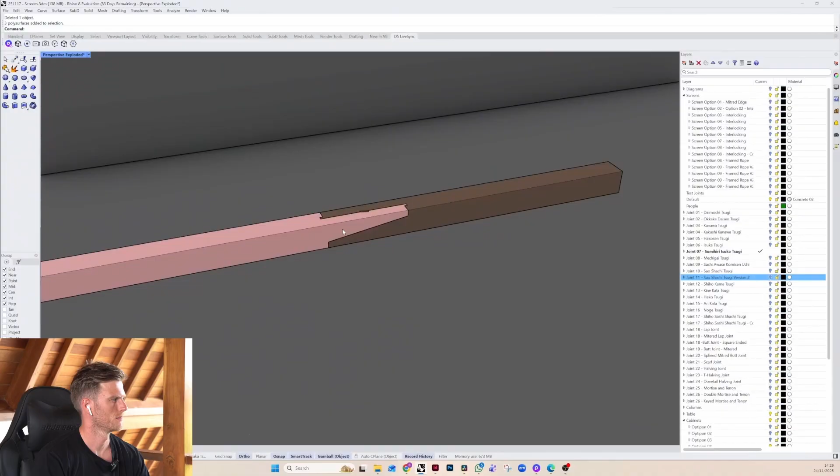Alright, so in this video, what I'm going to do is animate this beam that we have here. So we've got the Sumikiri Isuka Tsugi, which is this kind of double split joint with this locking key as well. So we've got that in Rhino. What we're going to do is create an animation similar to this one that I've already done in D5.

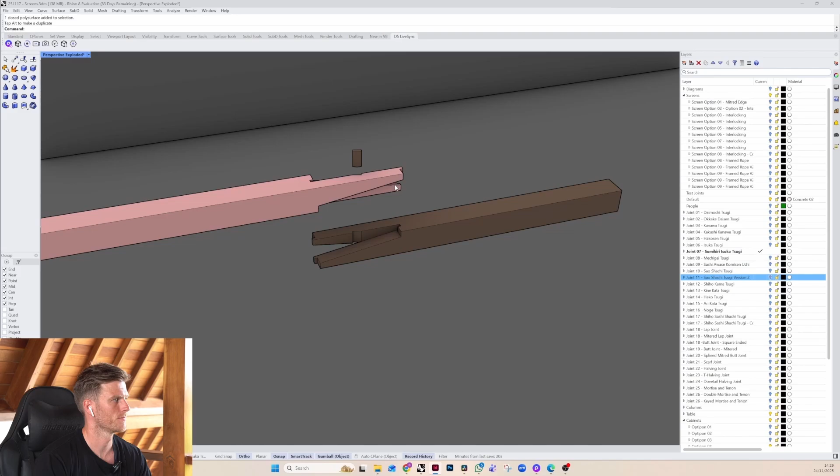So really simple, clean animation that just shows how these components come together. First thing that we need to do is go back to our Rhino. I'm just going to undo that so that the beam is together, and we're going to select all of our objects. You can see in Rhino that I've already arranged each object onto a material layer, and that's useful when we get it into D5, you'll see why.

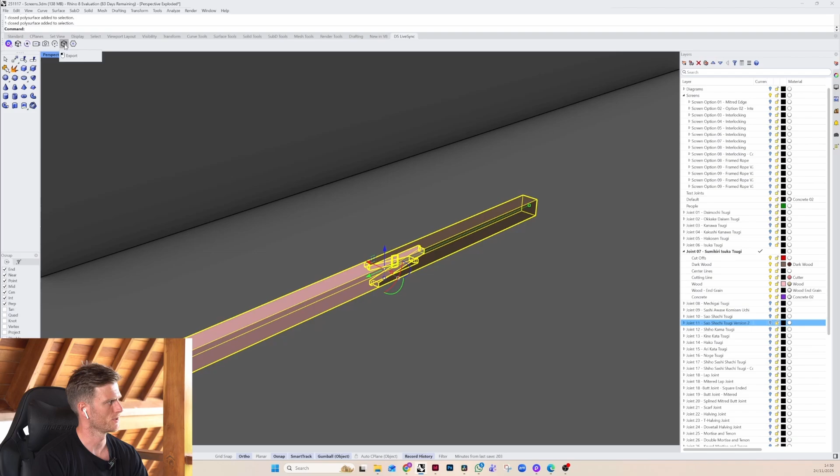But what I want to do is go and just click on this little icon here to export. And we've got a few options: export all, export object selection, or export by layer selection. We want to click export object selection, and we're going to keep our 3 layers intact and click export. And then just save it wherever you want, give it a good name.

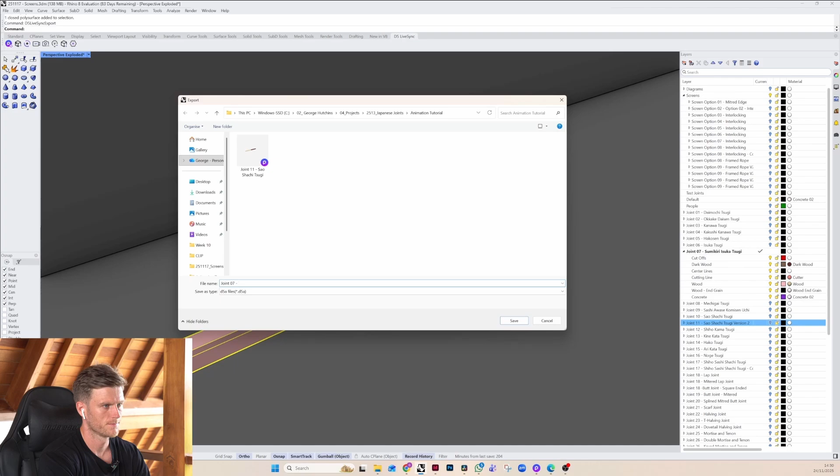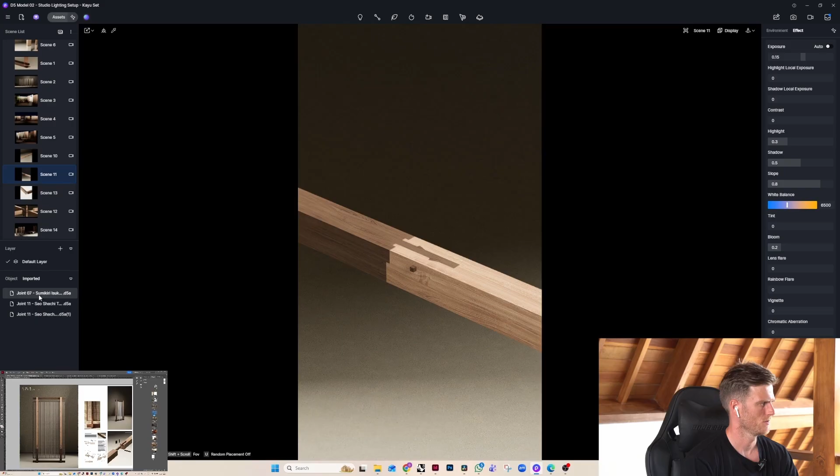What I want to do is just go up to import in the top left, and we can find our exported model, just click on that and open. Then you'll see down here in our imported list, we've got our different joints. So click on your object and just drag it into the scene.

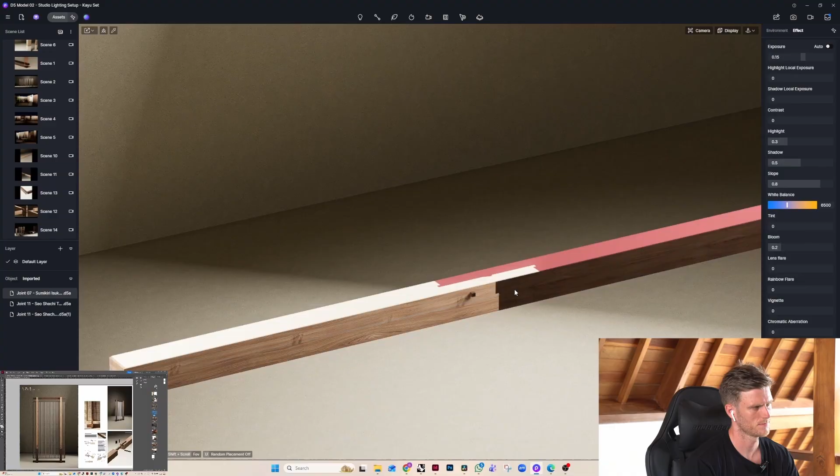So now we have our object in our scene, and we can just move it into place wherever we want it. Around there is good. Actually, I'm just going to drag it up a bit. You'll notice that it comes in without the materials, so we'll add our materials within D5.

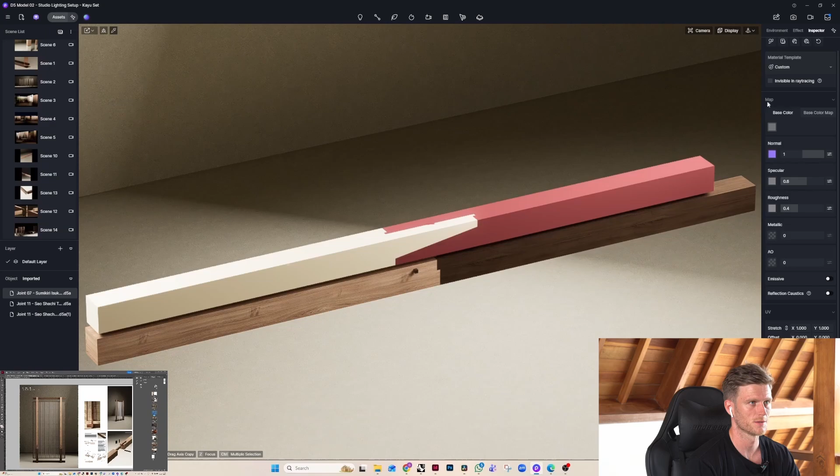A good way to do this is with the eyedropper tool. So if I just click I on the keyboard and click on this brown wood that I want, now you can see that material comes up. If I come up to here and click duplicate, I can just paste it onto the material that I want. You'll notice that the pin in there has also got the same material because it's on the same layer within Rhino.

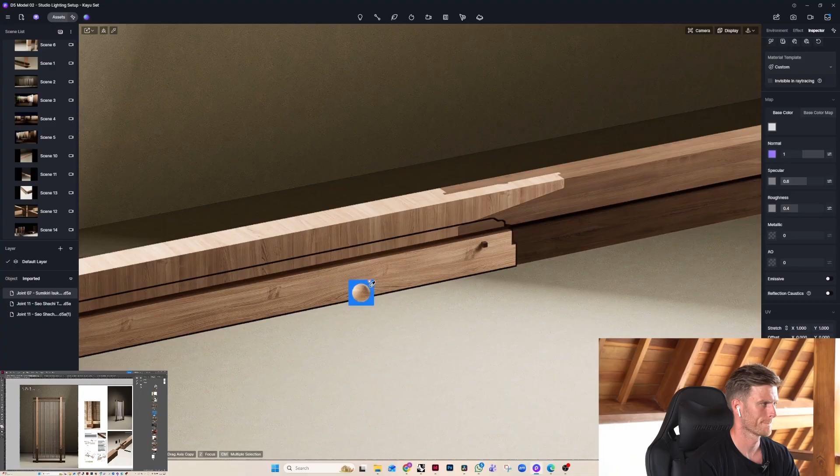And so if I do the same for the light color wood, now you'll notice we have something a little bit funny going on with this second beam where the mapping is in the wrong direction. So what I want to do is I could either rotate it directly in here in D5, so come down here and rotate 90, but then what that will do is, oh, it hasn't.

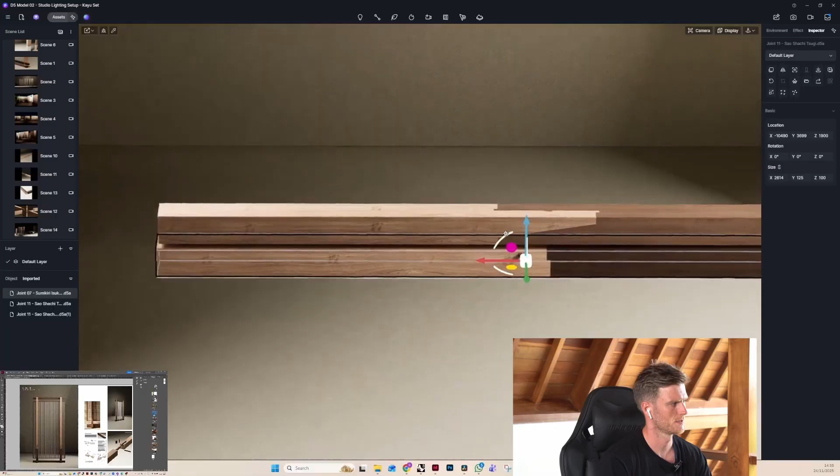Okay, that's good. Sometimes it would rotate all of these materials, so this one on the beam below would end up flipping as well. So then we go back into Rhino and remap in there, but this is okay for now.

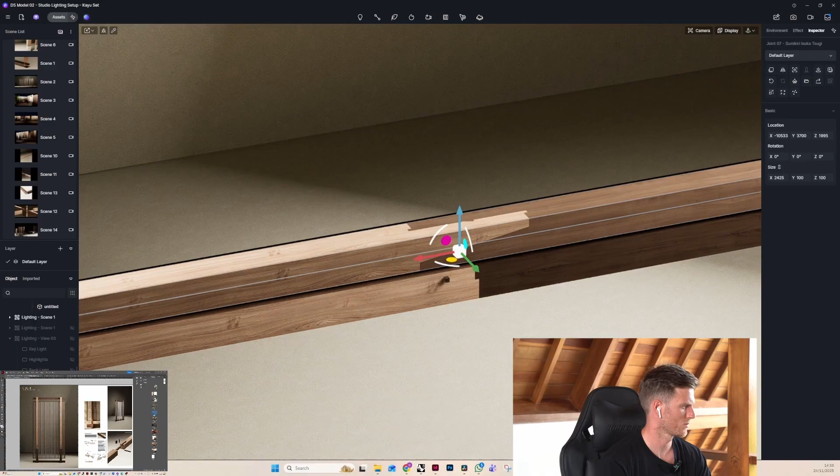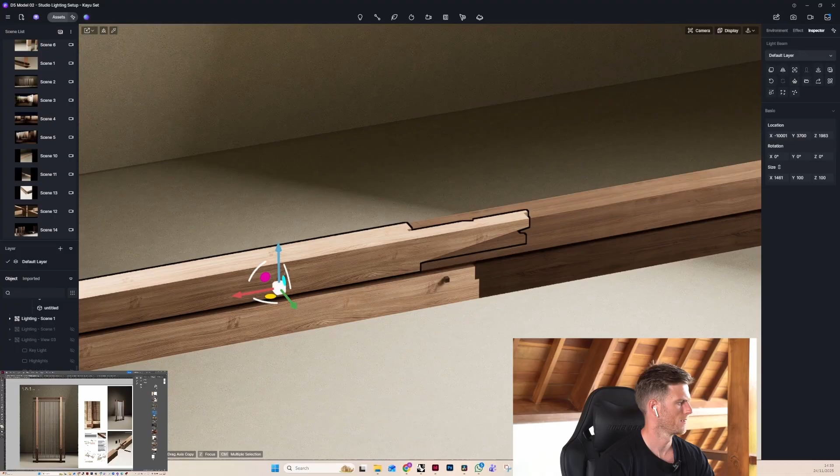So if we go into our object tab, you can see that that object has imported with our layers. So we've got wood and we've got dark wood. If I click on this object here, untitled, and move it up, you can see that that's our little lock pin. Just undo that, and I'm just going to rename these for clarity. I'm going to do light beam, then, and I'm going to name that dark beam.

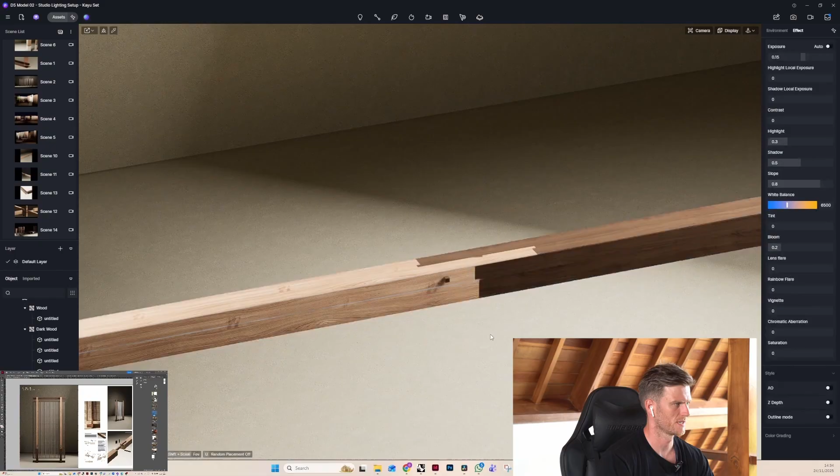And then I'm just going to move everything down and around the same location as my other beam. So now we have, if I can turn that one off, a new interlocking joint in position, ready to be animated.

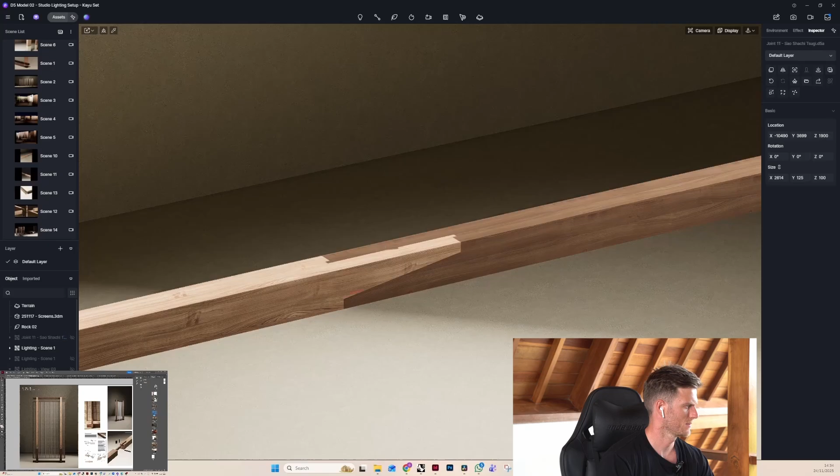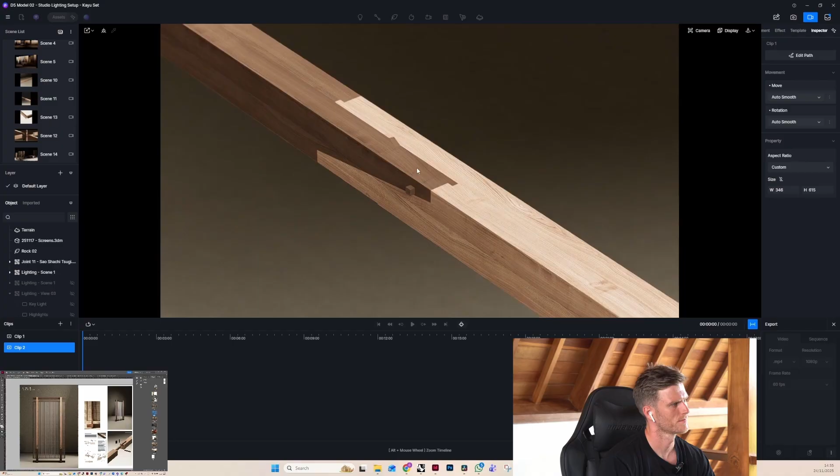So I'm going to go up to this little video icon here, and you'll see I've already got a few things going on here from the animation I made before. So I'm just going to create a clip, create a new one. And I'm going to go over to my starting scene. I'm going to hide this beam because I don't want that. I'm just going to update the scene.

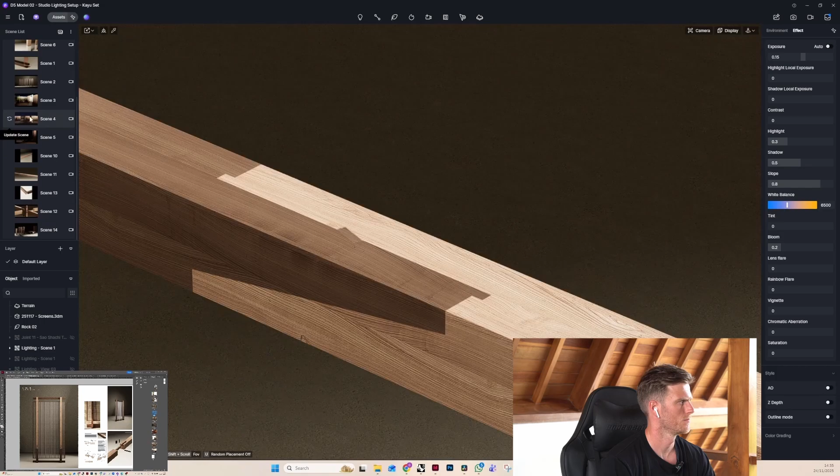So I want this to be my starting location. So I'm just going to click create shot here. So we've got shot one. And if I run it, you'll see that nothing happens.

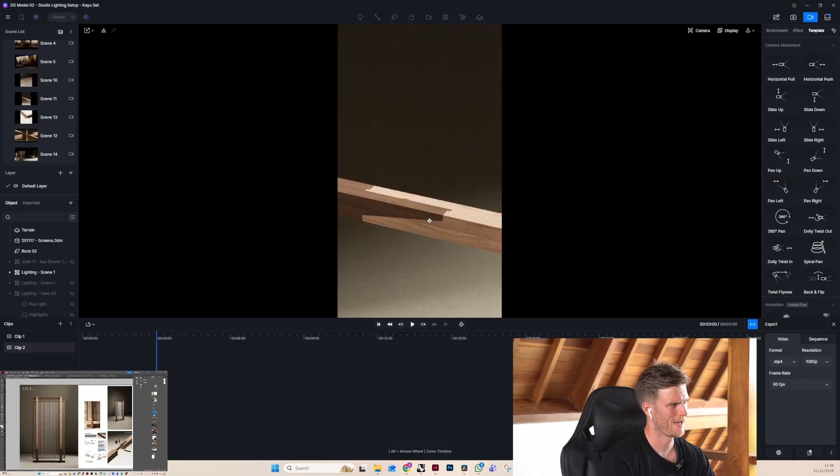So what I want to do is pan or orbit a little bit, zoom in to wherever you want your second shot to be. I think something maybe on a viewpoint like this might be good to show this interlocking piece of the dark wood. If I just go down to here, and if I just switch views on this little icon here, we go to our timeline. What I'm going to do, just demonstrate that again, is go to our end frame, maybe something like this.

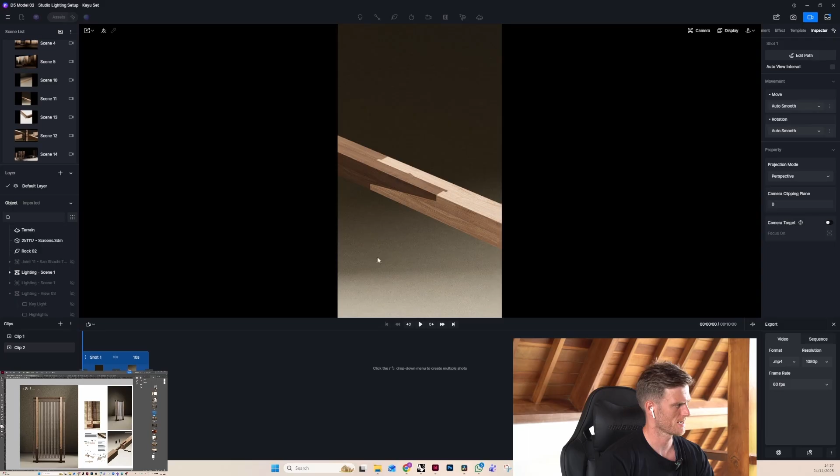And just click this little camera button, and that will add our end frame. You'll notice that was quite fast because we've got 3 seconds. So the duration of path is dictated by this number here. So we can put that to around 10 seconds. And now we'll have a much slower animation. What I'm going to do as well is just remove that ease in and ease out so that we have a continuous pace of shot.

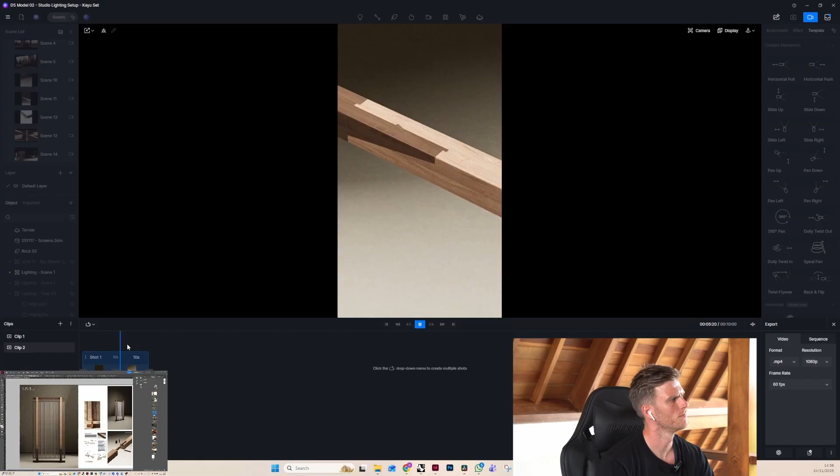Alright, so if I go to switch view again, I can start to add my animation. D5 is great because it has all of these different templates, and the ones we want to use for animating these beams are these ones. So I'm going to use ascend to start, and I'm going to do light beam to start. You'll notice here we're selecting the objects that we want to animate first, and we're going to do these one by one. Click done.

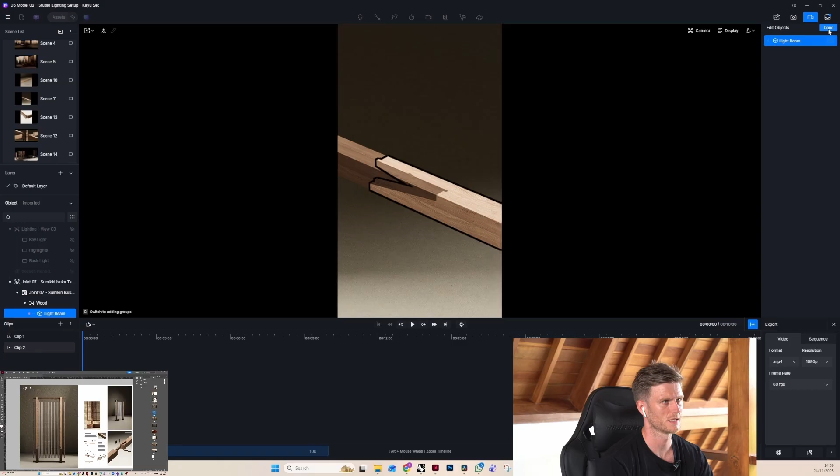You can see that beam flew into the scene there. So what I want to do now to edit that and get it moving how we want is select our little purple fly-in animation, maybe extend it a bit as that was quick, and I'm going to change the distance to 1 meter. I'm going to change the direction to 180, so that it comes in from the right hand side. Now if we roll that again, and spacebar, you'll see that slots together quite nicely, coming in from the right hand side. There you go.

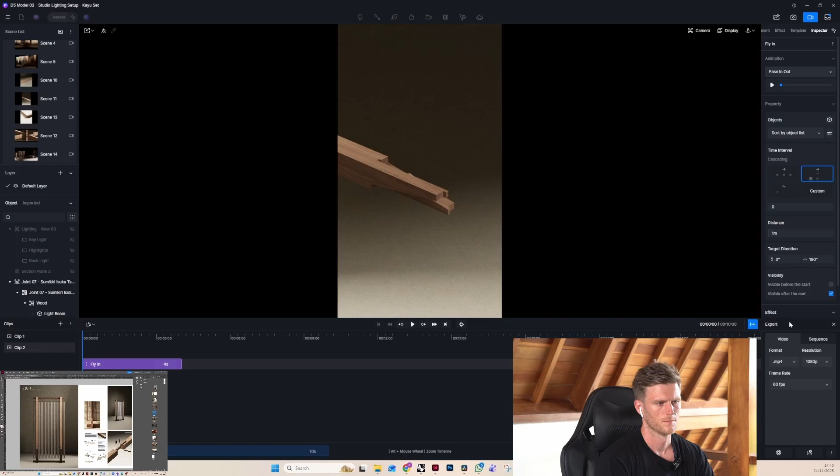Now I can duplicate that. If I click on this, I can edit the objects. I'm going to remove the light beam and just click on the dark beam, and have the same thing happening for the dark beam, except this time we want to go back to 0, because you want it to come from the left.

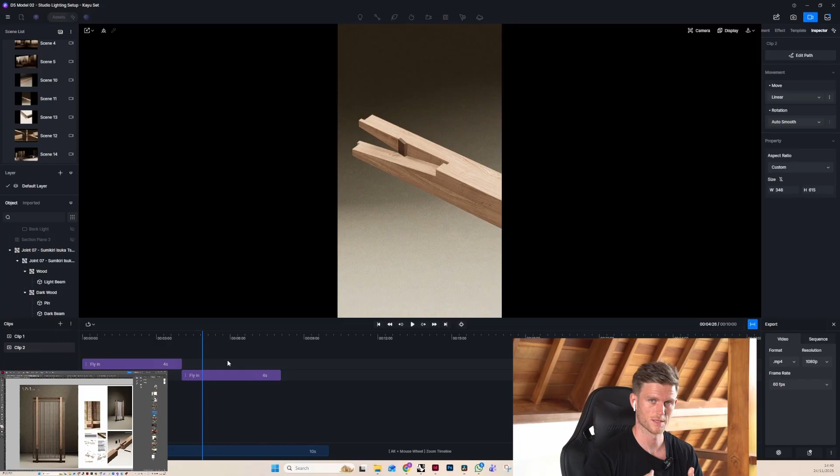You'll notice that there's this light beam coming in and then the dark beam coming in second. What I think would be cool is to have them coming in at the same time. So what I'm going to do is drag this second beam to around halfway between the first beam and see how that looks. I was thinking pretty good.

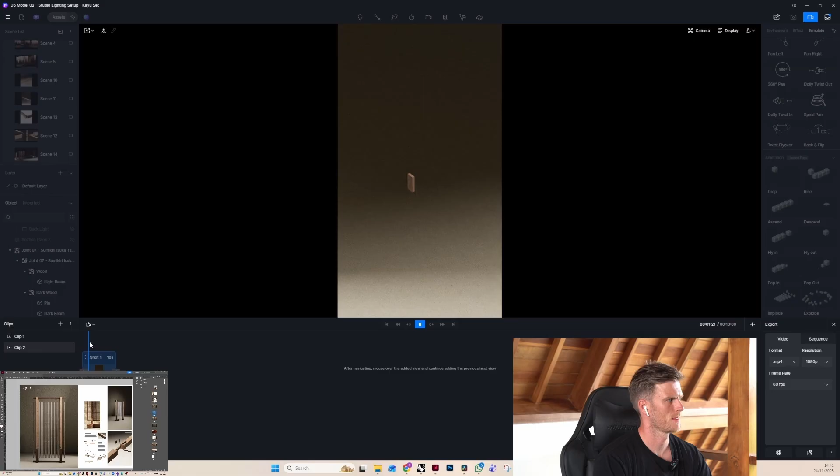But I think what's happening now is I don't quite like this camera movement. It's kind of going up and down, it's a bit distracting. So what I'm going to do is go back to our camera view. I'm just going to remove that one, and whilst we're animating, I'm just going to keep that camera still. So we'll work on our animation to start.

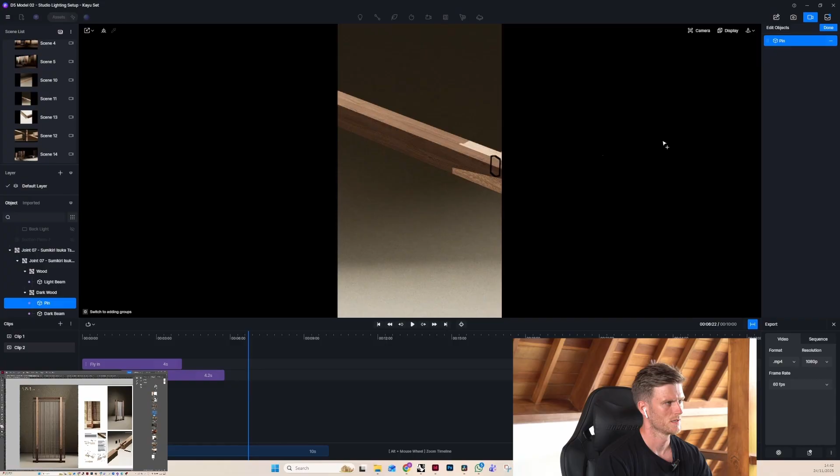Alright, so our two main beams are going in. Now what I want to do is drop our little pin into position. So, done. If I just demonstrate that again, delete that, I'm going to go back to our template tab, click on drop, and then just select our little pin in there. You'll notice there, pin is now an object, so just click done.

Now what will happen is, boom, our pin drops down from the sky and locks these beams together. I'm going to drag that underneath a little bit. It's moving a bit quick for me, so I'm just going to do, again, 1 meter. Maybe drag that out. I think that's pretty neat. Might even just drag this back a little bit so that the beams come in like that, yeah.

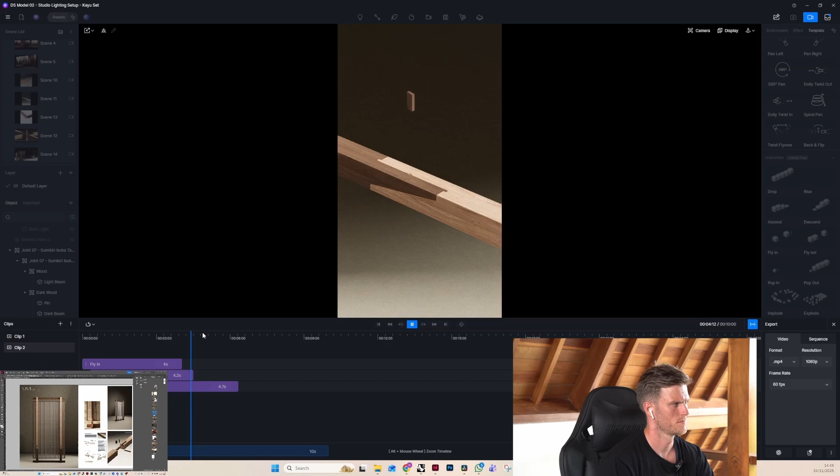And even that can come a bit quicker or a bit sooner. Okay, I'm happy with our sequence of animations. Now what I'm going to do is just make this camera movement a little bit more dynamic, a bit more interesting, so we're not so static. Again, I'm going to actually use the fly, zoom in a little bit, move left and pan. Something like this could work, and then just add scene there.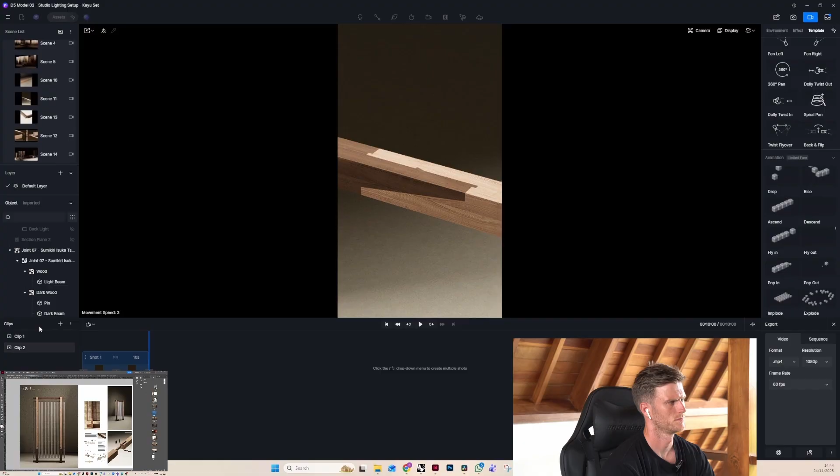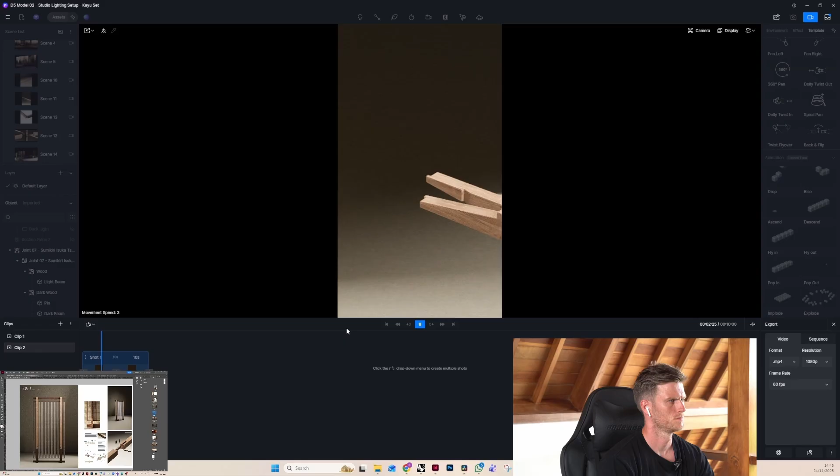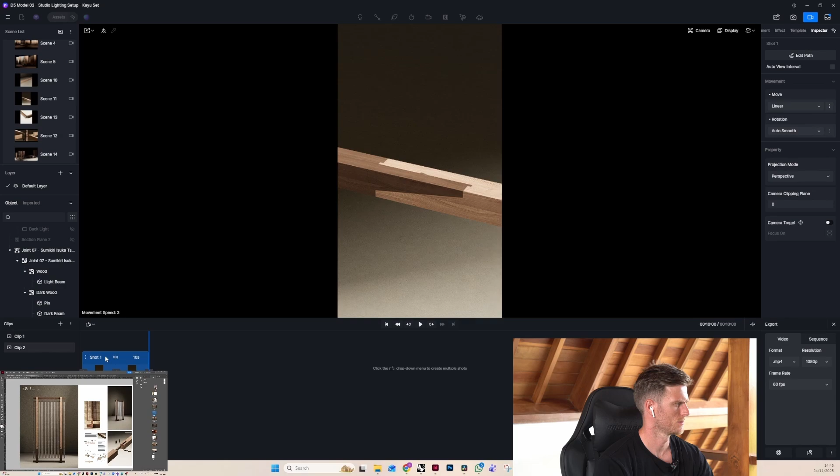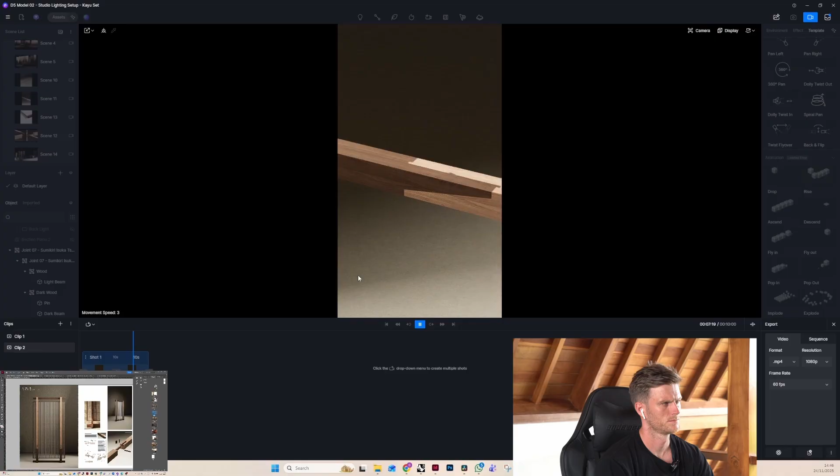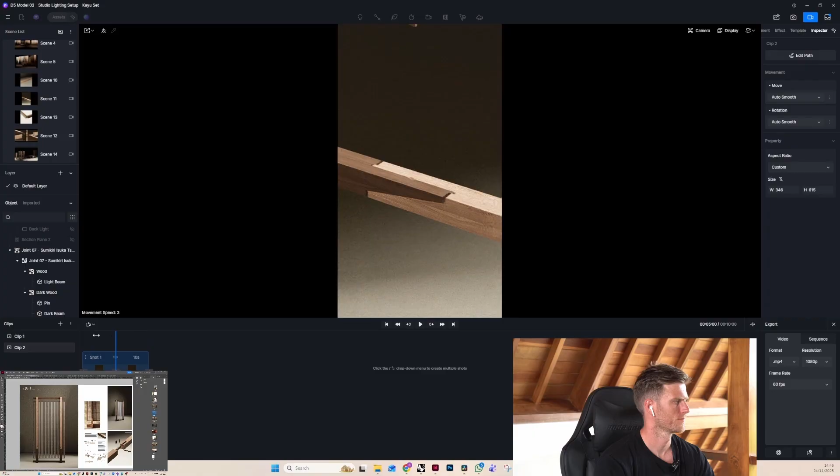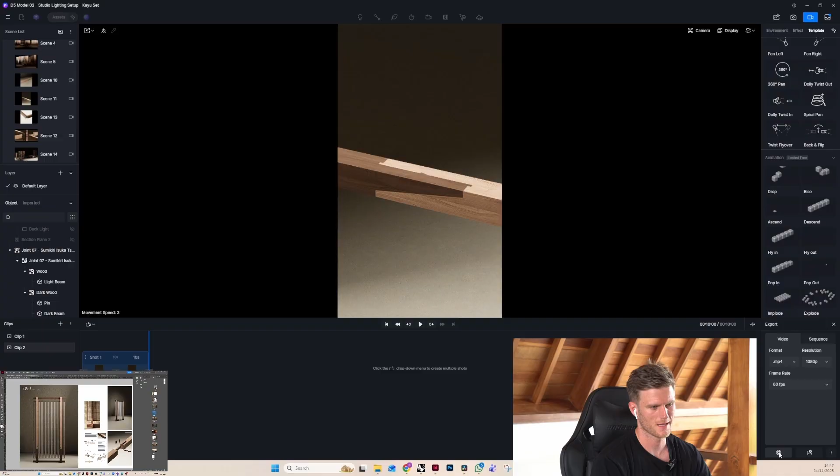Perfect. Okay, that is our animation done. Now I'm just going to export that. Hit render. And we're done. I'm going to add some sound effects in DaVinci, and then I'll post the final animation.

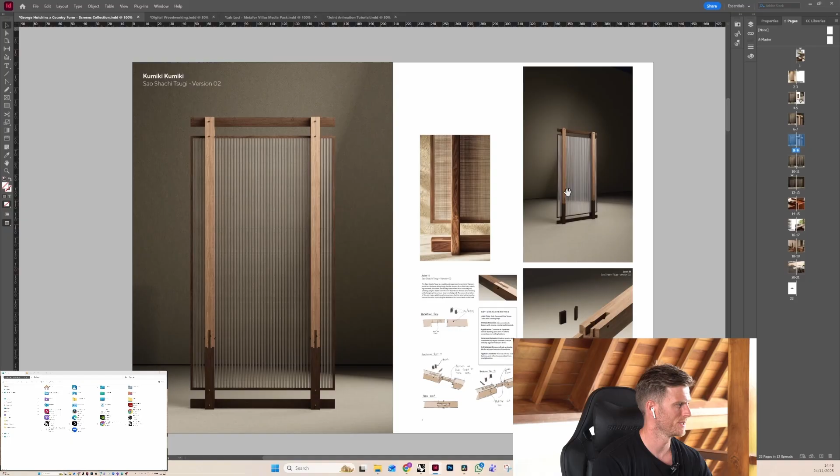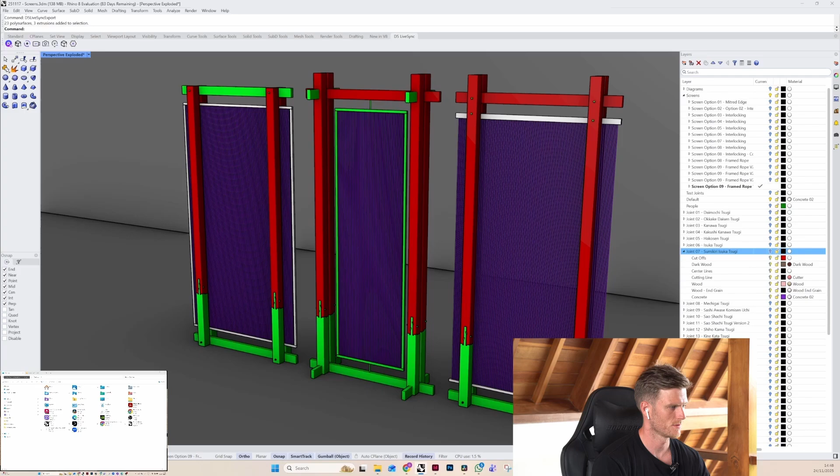In the next couple videos, I'm going to go through a few more of those joints that we've already modeled, and then also start to animate some furniture pieces like you see here. So I'm working on these screens at the moment, and we're going to run a similar idea. Let me open it in model actually. Similar, oh it's not going to work. Anyway, you can see in Rhino there. I'm going to run some animations of these screens where all these components and beams start to interlock together to really tell the story of these design pieces. So see you in the next video.